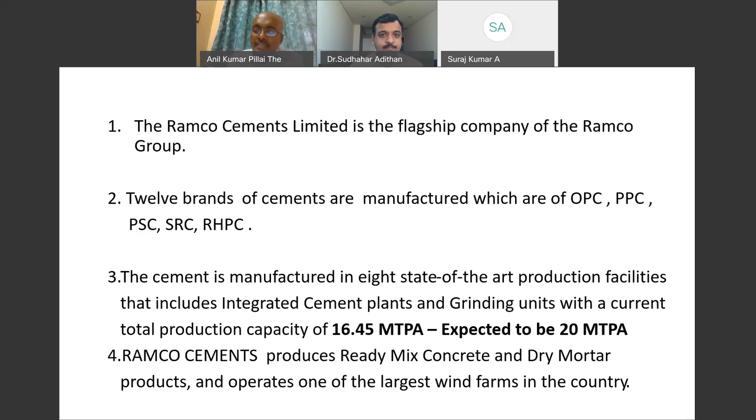Apart from cement, we are also into ready-mix concrete. We have an RMC plant at Chennai, and we have a dry mortar product established in collaboration with MTech Germany. Dry mortar product is very useful for non-structural applications, especially plastering, or for example Super Fine, which is our cement-based putty. We also have tile grout, and we operate one of the largest wind farms in the country, because from the sustainability perspective that is very important.

This is just an overview of the various types of cement that we manufacture. Within ordinary Portland cement, as per IS 269 - as all of you would be aware, now there is no longer a separate code for 43 and 53. Everything is combined, and it is IS 269.

We have also introduced a new customized cement for applications where you need higher slump retention - that is the Ramco Infra 53 grade. When we were doing trials with chemical admixtures, we found we could help ensure higher slump retention, especially in cities like Bangalore, when concrete is being transported over longer distances.

All of us would be aware that the construction sector is also using precast applications, and for that we thought, why not have a specific cement for precast applications. So we introduced Ramco Superfast, which gives a higher rate of gain of strength, because precast application requires faster removal of mold, minimum breakages, minimum edge breakage, and of course economy in terms of number of blocks per bag, which all precast units want to be higher. That is what Ramco Superfast helps in achieving.

Then we have the PPC cement - Super Grade, Supercrete, Super Fine, and Karthik Super Plus. Supercrete is a cement customized for all concreting applications, with the advantage of a high rate of gain of strength and low heat of hydration. Then we have Portland slag cement - Ramco Super Steel and Ramco Samudra - and our sulfate resisting cement, Ramco Super Post.

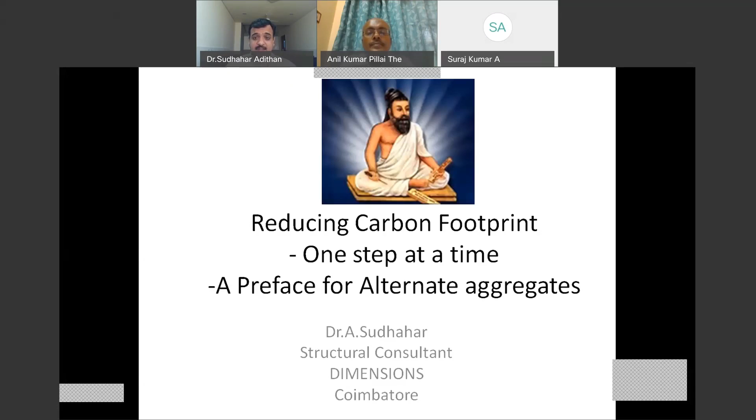The use of alternate aggregate should be more towards reducing the carbon footprint of our construction rather than using it for technology's sake or economy's sake. Of course, those are all benefits which we will achieve. But I think for a practicing civil engineer, his first responsibility is to reduce the carbon footprint, and that is why alternate aggregates take a driver's seat today, at least in today's topic. And this is one of his famous Tirukurals.

Excuse me for the blurred graphics. It is Katka Kasadara Katpavai Katrapi Nitka Adarkitaga, which means while learning, you'll have to learn it thoroughly, without a speck of dirt. And more important than learning is that you should stand by what you have learned.

This is where we as civil engineers sometimes fail in implementing sustainability. We all study about carbon footprint. We all study about being environmentally responsible. We know usage of resources unscrupulously would lead to more emission of greenhouse gases. Therefore, this will happen, that will happen. All this is known, but are we really standing by what we have studied is very important.

That is why the last three words in this Tirukural are very important: Nitka Adarkitaga, which means you'll have to stand by what you have learned. I think it is the order of the day that you'll have to stand by what you're going to learn in the next 1 hour and start promoting the use of alternate aggregates.

Now, this also is connected to Tamil literature. I will quickly go through this. Tamil literature has always classified the type of lands where people are living into 5 different categories. One is Kurunchi, which denotes hilly areas or hill-related areas. Mullai is forest-related area.

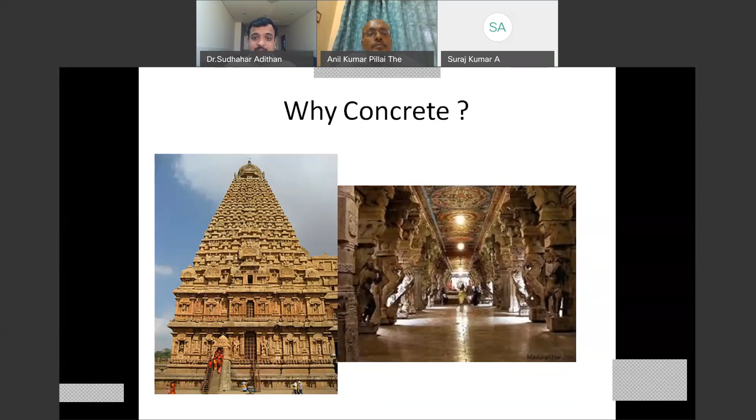Availability of stones were there. Therefore, the first forms of civilized constructions were all huge, and they mostly used stones. Then the limitation on handling such large loads came into picture, so we started using smaller stones. We started using stones only, but at a smaller load level, which means we reduced. We also started the usage of bricks, which were imitations of stones, but at a much smaller level.

So from large stones, we moved to small stones. From small stones, we moved to lighter small stones, which is the bricks and the small clay tiles. That is the predominant kind of material used in the palaces of Karaikudi, South India, and anywhere in India for that matter. So we came to smaller stones.

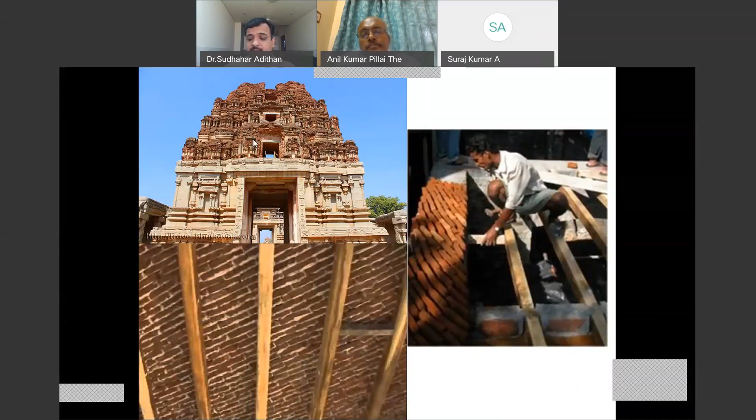Now we have moved to still smaller stones, namely the coarse aggregates. Now, in one perspective, I feel the capacity of a single human being to carry large weight has gone down due to some reason, some evolutionary reason. So we will have to delve deep into Darwin's theory to understand that.

But as such, on one side we have been improving in technology, on the other side we have been traveling towards convenience of using stones, and thereby we started developing alternates for stones, and we have ended up in something called concrete, which is nothing but an imitation of stone itself. Only thing is we use smaller size of stones, we use various other ingredients, make it very workable, moldable, and we cast them into the different shapes what we need. And once they set and harden, they again imitate stones. So the funda is to imitate a stone. So we started using concrete.

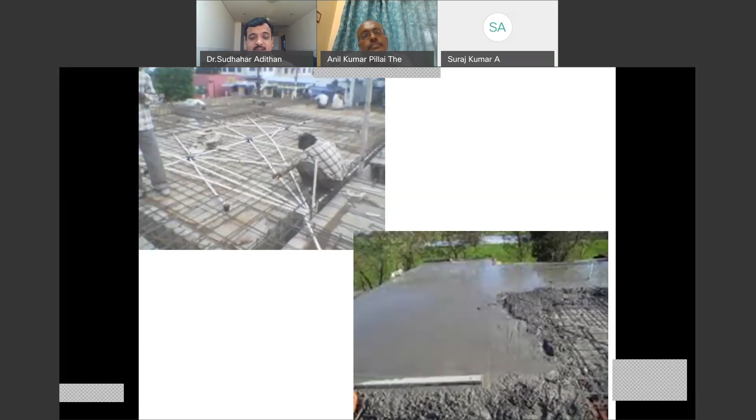So what do we have in concrete? Any civil engineer's answer would be concrete is a mixture of coarse aggregate, fine aggregate, with a binder, with water and some chemical admixtures, blah, blah, blah. There is a theoretical definition to it. But each of these ingredients have got a definite role to play in the concrete as a matrix itself. So what is the role of each ingredient? That has to be understood properly.

Now looking at concrete as a replacement for the stones, what is our requirement out of concrete? It is definitely the strength, because that determines the engineering parameter in which you can design these imitated stones, the concrete. Of course, the workability, because workability will define the ease in which you can cast them into the required shape and size. So the ease of casting is called workability. We also need durability, because we need to have a very practical and affordable lifespan for the concrete structures what we design.

Now, if you look at concrete as a matrix, there are a lot of factors which influence the performance of concrete as a structure. The major headings are materials, the concrete mix itself, the mix proportions of concrete, the method of construction you do, and the design you do for the structure, not the concrete mix design, I'm talking about the design. If you look at the materials, aggregates are there, the type of aggregates, the grading of aggregates. We'll be dwelling about this in detail in a little while from now.

So the materials, namely aggregate, cement, water, and admixture, have a key role in determining the quality of concrete and therefore in determining the performance of the concrete structure.

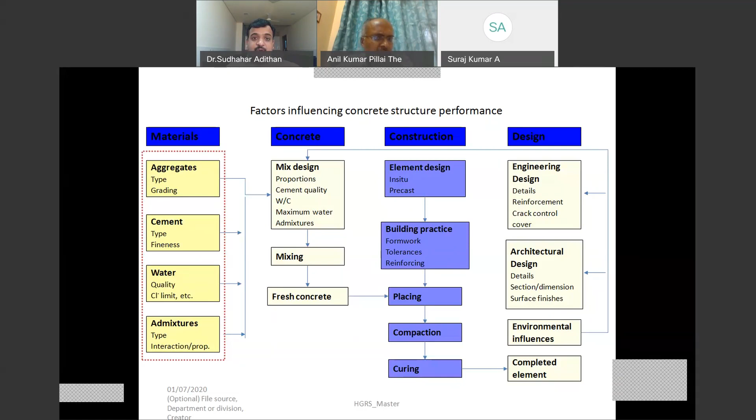If you are not able to bite it, you have pain, and it is very difficult to bite, then probably it's time for you to visit a dentist. So it will be that hard. Now what we learn from this is, as we just saw, the primary requirement of concrete is durability, I mean, strength.

So if concrete becomes as strong as this, and if its macro structure can also be compared to this, then are we achieving the purpose? No, because this has got a lot of porosity. If you try to pour a spoon of ghee or water or any liquid on top of it, you can understand that it will start oozing through and percolate out, which means it has got voids.

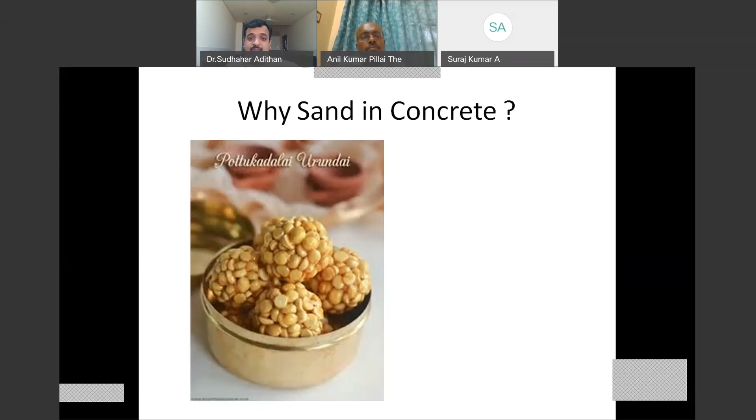So to prevent ingress of liquid, you have another snack, produced from the same ingredients but prepared from the flour of that gram. It is called ma laddu. That gram has been grinded into a finer form, which I would like to compare to fine aggregate. The same jaggery is used and made into the form of a laddu. Now if you pour a spoon of ghee or any oil on top of it, it doesn't percolate inside. So it is dense.

So it will very well protect your reinforcement system if you can prepare a concrete like this. But what you will observe is you will not get the strength, because if you use the same amount of jaggery, the strength development, the kind of stiffness which develops inside this snack, is reduced. Which means if you are using finer material, you will have to use more jaggery. In concrete terms, if you are using finer material, you will have to use more cement, which will again kill your economy. Now this is good in terms of not allowing water to pass through, but it doesn't satisfy your strength without sacrificing your economy.

Now we had found out a newly improvised snack, which is a combination of 1 plus 2, which has got the coarse whole gram as such, and the flour of the powdered form of the dal, and also you have jaggery. Now this system satisfies both. It offers you the rigidness or strength of the first one, and it also serves as an impermeable system where you cannot percolate any liquid through this.

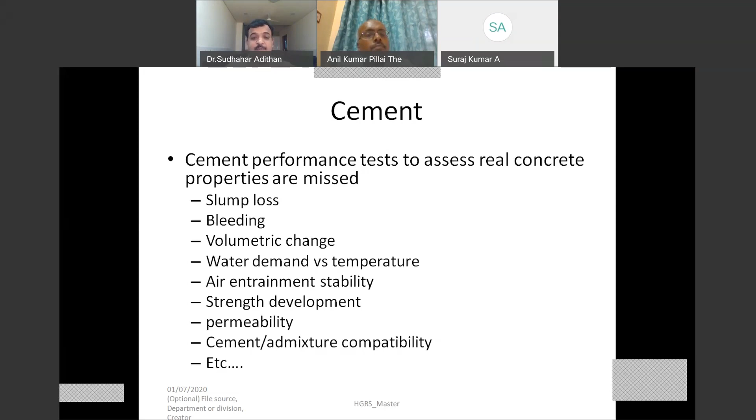It has got two implications. One is the physical properties of cement, which can affect the rheology or performance of concrete. By physical properties, I'm talking about particle size distribution, setting time, consistency of cement, etc.

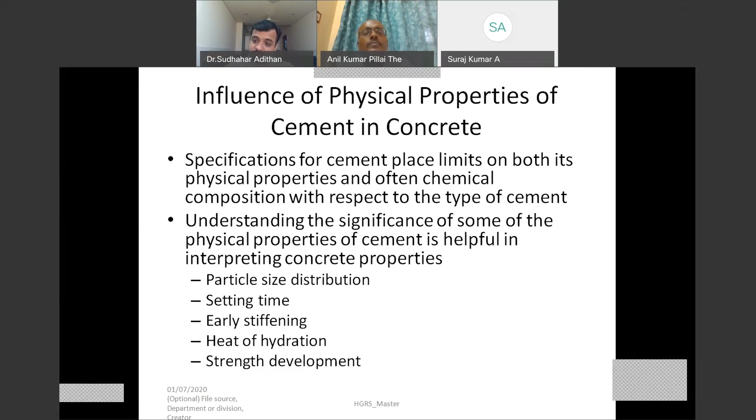There is also the chemistry of cement itself, which is very important to know, like how the Bogue compounds are reacting, what would be its implication in the isothermal conditions of the concrete, which compound will react when, what is the sequence of reaction, when would the ettringite be formed.

All these are very vital for us to take a decision whether we can introduce a particular form of aggregate as a replacement for the conventional aggregate, because each aggregate has its own physical and chemical nature. So we need to know where we can fit the chemical nature of our proposed aggregate into the system, with the view of the cement being used, because as of now we don't have an alternate for cement, at least on a commercial or practical sense, whereas replacement for aggregates has already reached a practical level at the site and project level.

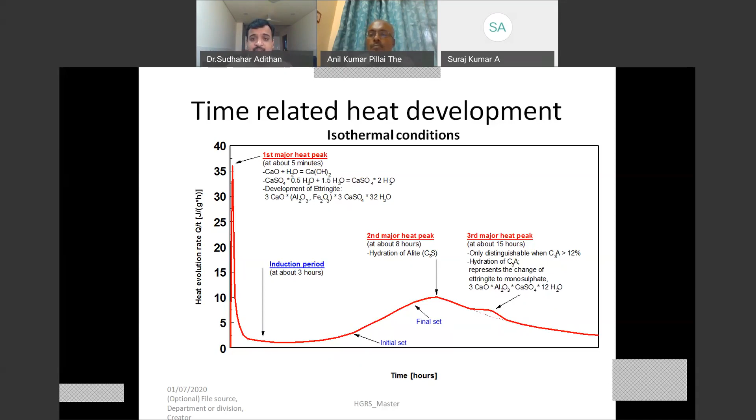So it is important for us to understand the chemical reaction of cement, for which I've given this graph as a representation, which talks about the isothermal conditions and role of each of the Bogue compounds in the hydration of cement. Coming to aggregates.

If you theoretically classify aggregates, you can classify them into two types: primary aggregates and alternate aggregates. But on an academic level, people have segregated this into three categories: primary, alternative, and manufactured. On a practical sense, I would treat both alternative aggregate and manufactured aggregate into one silo - these are all alternates for the conventional or primary aggregates.

These alternative aggregates are further classified into recycled aggregates and secondary aggregates. Recycled aggregates, as the name suggests, is primarily construction demolition waste which is again brought into use. So a concrete may be pulverized and segregated into coarse aggregate and fine aggregate from construction demolition waste.

We would also look into what the code book has to say about these alternate aggregates - I'll share some snapshots from the code books. Basically, these are all alternative aggregates, either in the aggregate form itself, that is construction demolition waste, or it could be a byproduct from other industries, for example bottom ash, copper slags, steel slags, etc. These are byproducts from other industries which can be used as an alternative for conventional aggregates.

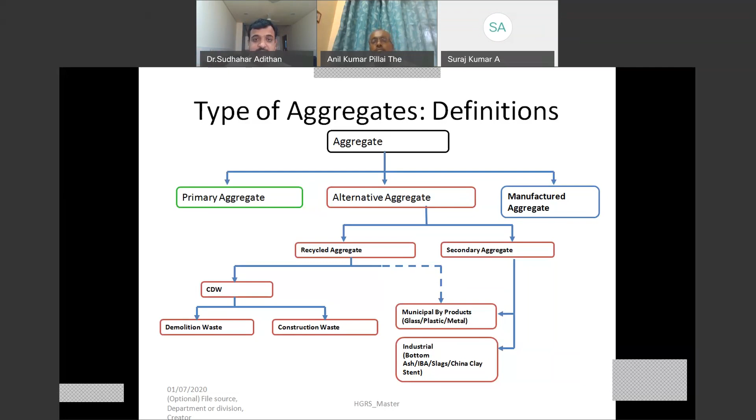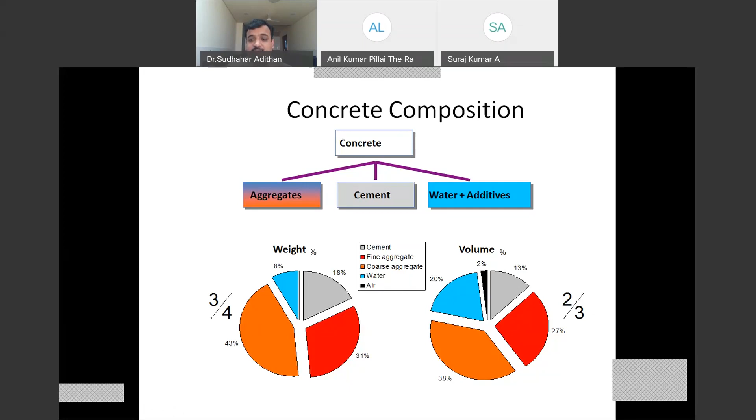If you look at concrete as a matrix in terms of weight, roughly 3/4, or 75% of it, constitutes the aggregate mass. In terms of volume, it is 2/3. You can see in both pie charts there is only one major difference: the presence of entrapped air. In terms of volume it is quantified, whereas in terms of mass it cannot be quantified, because for a concrete system the weight of air is treated as zero. So the moral of this chart is we should acknowledge that the major part of concrete is aggregates, and cement, though very vital both by mass and volume, the quantity is very small, though its role is very significant.

Now, what are the requirements of concrete aggregate? Any concrete technology textbook would tell you these requirements. It should be sound, meaning it should not have volume expansion or contraction with variation of temperature - it should be very sound. It should be clean - it should not have dirt or other impurities.

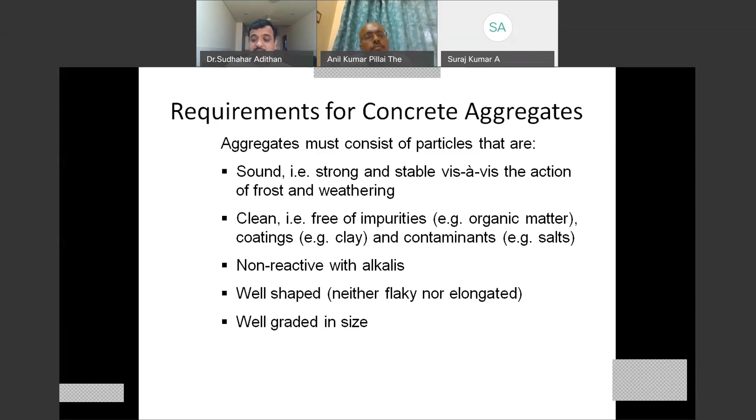It should not have a potential of alkali aggregate reaction, meaning it should not react with the alkalis from the binder, namely cement. Its shape is very important - it should not be flaky or elongated. This matters in terms of workability, but there are many situations where shape matters even more, especially for exposed concrete surfaces. The shape and size of the aggregates matter a lot, more than the engineering qualities of the aggregate itself.

Aggregates form up to 80% of the volume of concrete. They are ideally assumed as inert fillers, as long as you want to consider them very inert and non-participating in the system. But modern day research is finding a lot of information that aggregates can also participate in the hydration and result in different performance of the concrete system. So it is not always imperative that aggregates have to be considered as inert only.

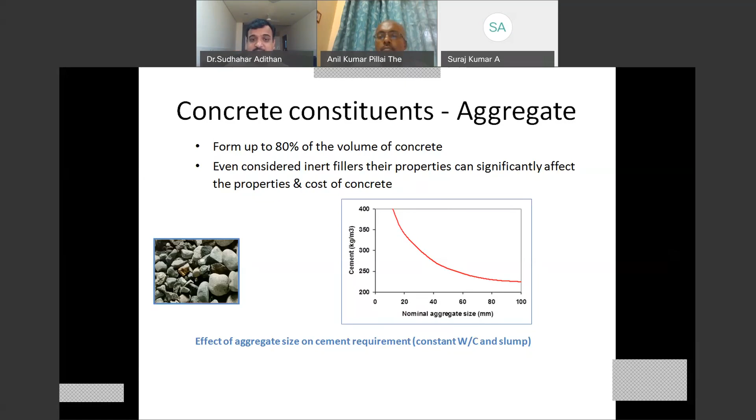The size of aggregates does matter, as we were just discussing. If the size of aggregates goes smaller, the requirement of the binder becomes larger, because for the same mass, a finer system has more surface area, which means it needs more binder to coat itself. As a result, you require more cementitious content in your concrete system. This graph is a simple depiction of it - don't take the values, but look at the pattern. If your nominal aggregate size is increasing, the requirement of your cement adequacy will come down.

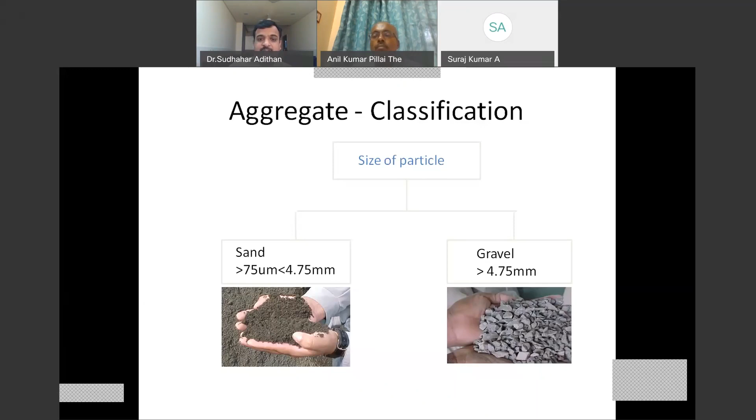If you have to stick to aggregate classification as far as concrete technology is concerned, whatever is above 4.75 mm you classify as coarse aggregate or gravel, and whatever is between 75 microns and 4.75 mm you classify as sand. Even though very purely you cannot take away minus 75 micron sizes from sand, generally a particle just below 75 microns and further down is classified as clay or silt. It doesn't mean they will not be present in the sand system - they will be present to a very negligible extent. So sand is basically between 75 microns and 4.75 mm.

The important characteristics of any aggregate are its shape and texture - shape in terms of achieving workability, achieving the compaction required, achieving the minimum void content. All those things are determined by the shape and size of the aggregates. The texture plays a key role in inter-particulate friction, and therefore also affects the workability of the concrete system. The grading, the different sizes available - we will talk about grading through an example now. The grading, color, strength, water absorption, surface - these are all very theoretical stuff which any checklist on aggregates would tell you. Resistance to freezing and thawing is not a very prominent feature looked into in Indian conditions, but in our projects in European countries, this is a very important point.

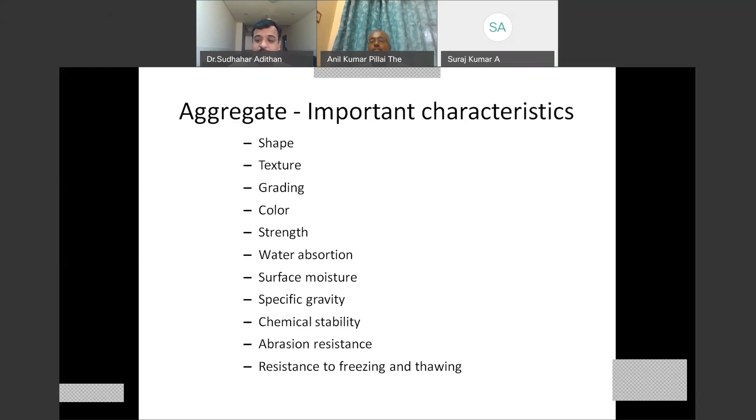Talking about the shape of aggregates - this applies to any aggregate, including alternate aggregates. Right now we're talking in very generic terms about aggregates, and slowly we will move into alternate aggregates. This is applicable for any aggregate, primary or alternate. The desirable shapes are mostly rounded, irregular, and angular. Rounded and irregular are very difficult to manufacture. Angular is easily manufacturable through the modern VSI systems of manufactured sand manufacturing.

What should not be there is flaky or elongated aggregates, as you would appreciate, this creates a lot of interparticle friction and will not allow the concrete to flow. So to achieve workability, you will have to do it either by increasing fine aggregate content, which means adding more cement and killing economy, or through increased water cement ratio, which will bring down the strength of the concrete system, or through increased usage of admixtures, which will again not make your cost effectiveness viable. So at the aggregate selection level, you should be very particular about the shape and size.

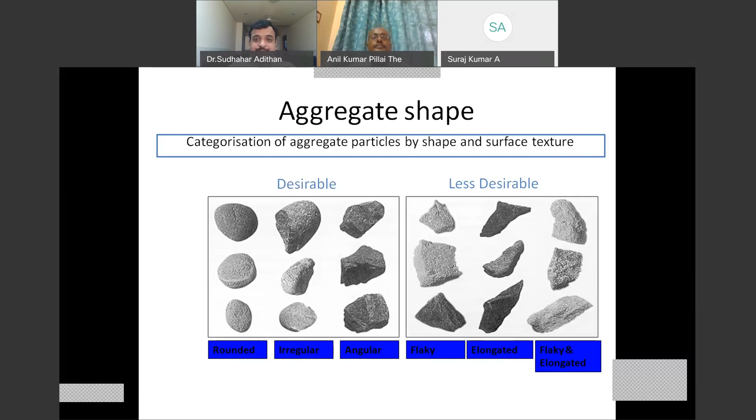Aggregate grading affects the following properties of concrete. It will influence the water requirements, the workability, pumpability, and economy, which is a very common sense thing - anybody who has touched concrete would be able to appreciate all these things. A bad shape of aggregate means a bad economy of the concrete itself.

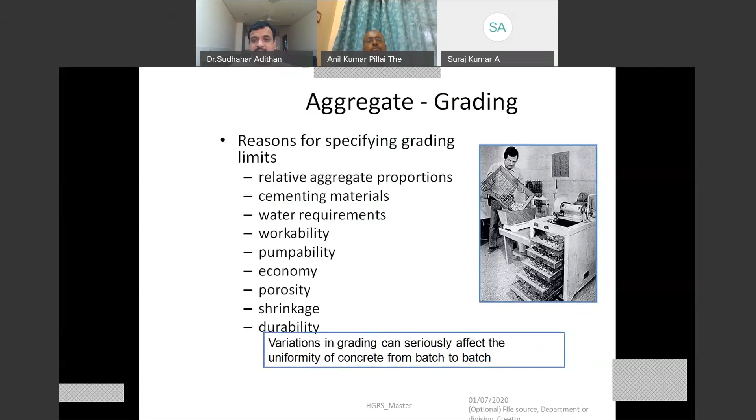This is a graph which we would have done umpteen number of times when we were a student. Sometimes those who are in the labs of construction companies would do it. I was just chatting with Anil sir about this particular aspect. A lot of us don't understand the importance of these grading curves, and in fact we don't understand the meanings of what these grading curves are telling us.

There is a reason for us to plot these in a semi-log sheet itself rather than a normal graph sheet. Try plotting a particle size distribution in a normal graph sheet, and probably you would require a graph sheet as big as a 10 by 10 wall. So to make it comprehensible, to make it practically usable, we are using a semi-log sheet.

So you should understand the implication of these shapes on the particle size analysis, be it fine aggregate, coarse aggregate, or all-in aggregate. I've been trying to push this as a very important point in the concrete technology syllabus in various universities. The sieve analysis of all-in aggregate, meaning coarse aggregate plus fine aggregate put together, gives a lot more meaning to concrete mix design rather than looking at the particle size distribution in isolation.

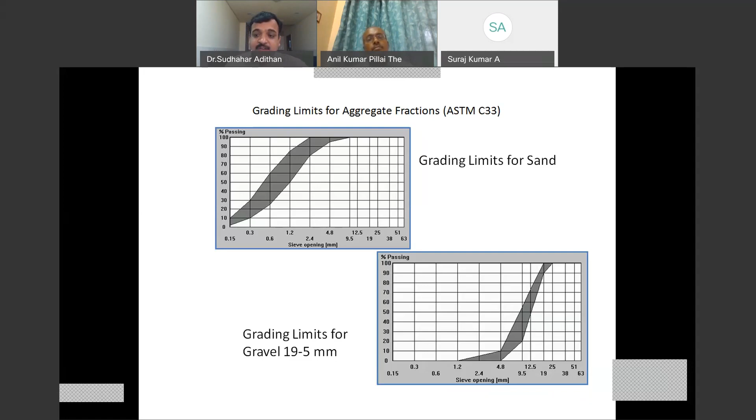So I would request, especially if there are students watching this lecture, please delve more into these graphs and try to understand what they are trying to convey to us.

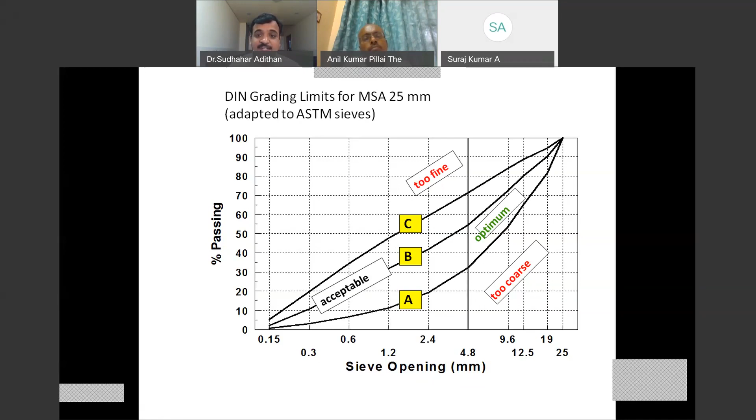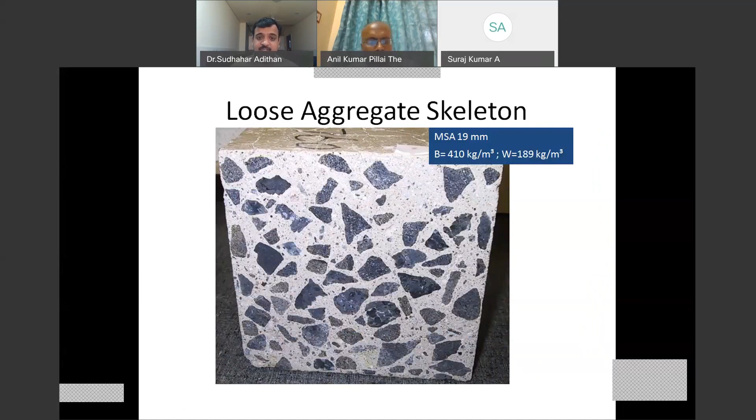You will have to understand a lot of graphs, the all-in aggregate graphs, to achieve that - the moisture content of the aggregate, the behavior of the aggregate vis-a-vis moisture, because all our mix designs are done based on this saturated surface dry condition. So while choosing alternate aggregates, we should be convinced, or have a cognizance, of whether our aggregate will be able to achieve this condition during the mix.

If not, what will be the condition of the aggregates when we use it practically, and therefore what kind of alterations you should do to the mix design itself. It is not that you create a mix design for the primary aggregates and just replace 10%, 20%, 30% of that with alternate aggregates and then do the experimentation. No, if you are replacing it with 10% alternate aggregates, you will have to see the implications in terms of moisture absorption, etc., alter the mix design accordingly, and then do the casting.

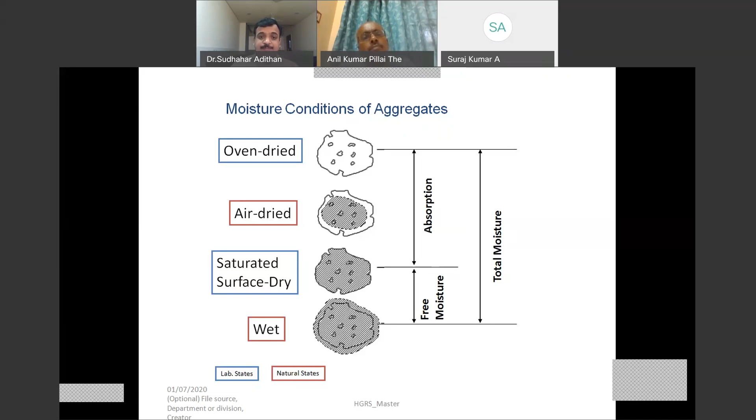The moisture content test nowadays is replaced by infrared moisture meters.

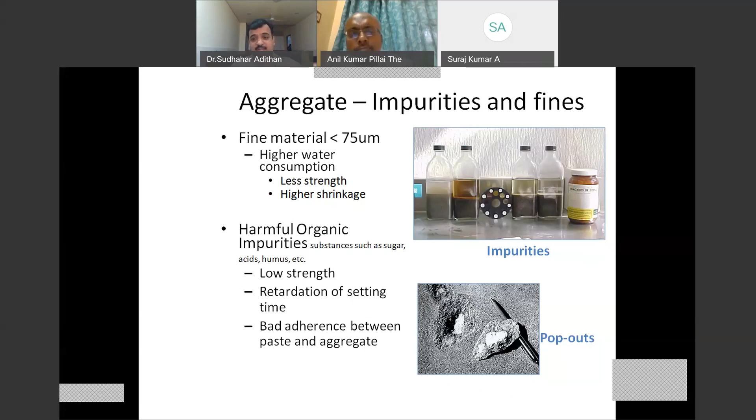The checking of impurities and fines in aggregates is very important, and it is very important in terms of alternate aggregates, because the presence of fines or even chemicals like cellulose, sugar, or acid, etc., will do a lot of interaction, will do a lot of hindrance to the binder performance itself. Therefore, you'll have to study all these before you choose an alternate aggregate system.

So we will quickly go into the alternate system. Now, if I have decided to use an alternate aggregate system, what should I do? I cannot just take an alternate system, replace the primary system and start using the concrete. I should authenticate myself, be self-satisfied and certified to use that alternate system. So I started searching who is the authority to permit me to use an alternate system, where to refer, how to approach this whole process.

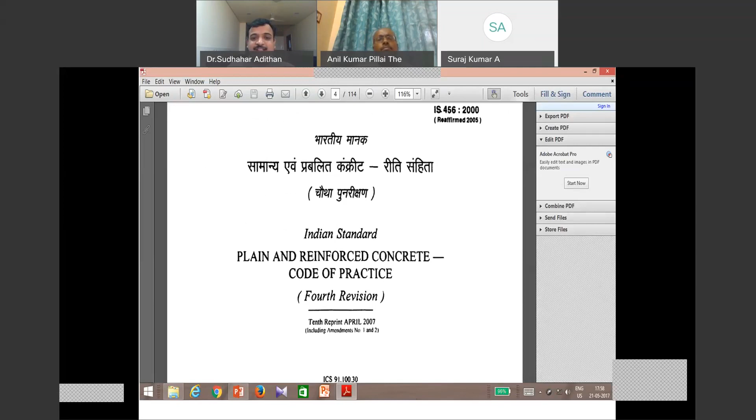So I started browsing through the basic book, IS 456, called the Bible of the Civil Engineer, or at least the Indian Civil Engineer. When I started browsing this, I found that under the aggregates section, clause 5.3, it says aggregate shall comply with the requirements of IS 383. As far as possible, preference shall be given to natural aggregate.

It's 'as far as possible' - I think in the next edition of IS 456, they will change this. We should in fact be telling that as far as possible, we should be giving importance to non-natural aggregates. Excuse me for a second, I am just running out of power here. I'm just trying to...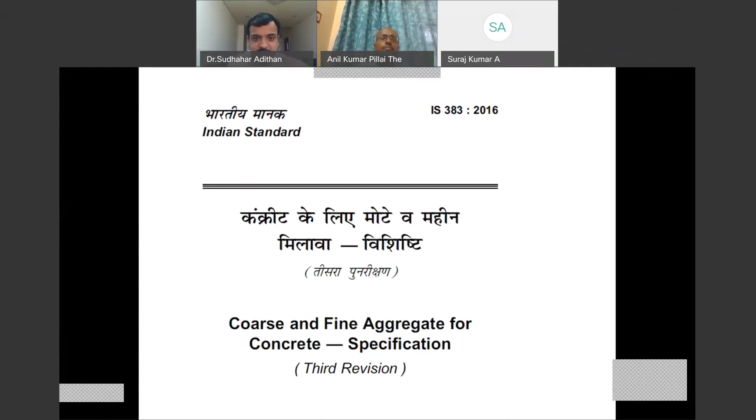So IS 383 is the reference in IS 456, so I switched over to IS 383. This is the old version, and now you have a 2016 version, which is a code book for coarse and fine aggregate for concrete specifications. Earlier it was specification for coarse and fine aggregates from natural sources only. Now that word 'natural sources' has been removed. Now it is only for concrete, and in the foreword it says you can use aggregates from any of the grading zones.

So you can use any of the aggregates from zone 1 to zone 4. But they say once you are using zone 4, you'll have to be satisfied with yourself by conducting a number of tests - meaning it doesn't bar you from using aggregates from any zone. Many practicing engineers had a doubt. Whenever I interact with them, they say they are supposed to use only zone 2 sand, and will not use any other zone sand. No, the foreword itself says you can use sand from any zone of classification. Only thing is, you'll have to make the mix design accordingly.

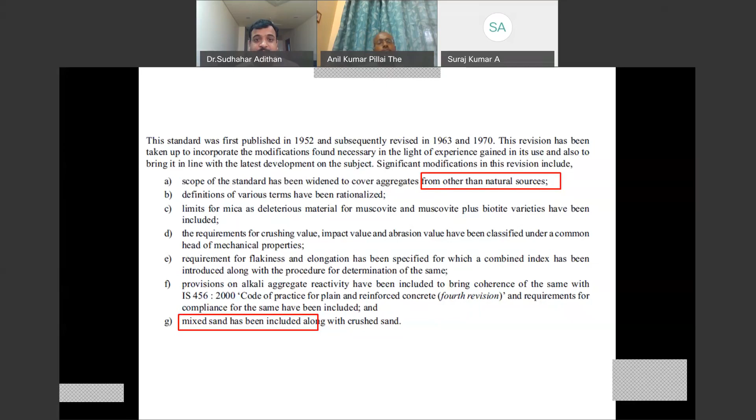Now, again, what does it speak about fine aggregate? It speaks about natural sand, crushed stone sand - popularly known as M sand in today's parlance. Now there is one more sand called P sand. Instead of M sand, we are talking about P sand also, which is a more refined form of M sand used only for plastering. So you can use natural sand, crushed stone sand, and also crushed gravel sand.

Now it also permits utilization of iron slag, steel slag, copper slag. Now this is interesting - a lot of people think iron slag and steel slag are the same. No, the process is different, and the chemical nature is also different. So you'll have to study them further in detail. A brief about all these manufacturing processes and the usage of these alternates is given in the annexure of IS 383 itself.

So you can use iron slag, steel slag, copper slag, bottom ash from thermal power plants. Of course, fly ash is used by the cement industry, concrete industry, and fly ash brick manufacturing industry. You can use bottom ash in form of aggregates, you can use recycled concrete aggregates - RCA - and recycled aggregates. These are slightly different: recycled aggregates can also be bricks, recycled bricks, whereas recycled concrete aggregates pertain to concrete alone. The code books permit us to use any of these as an alternate.

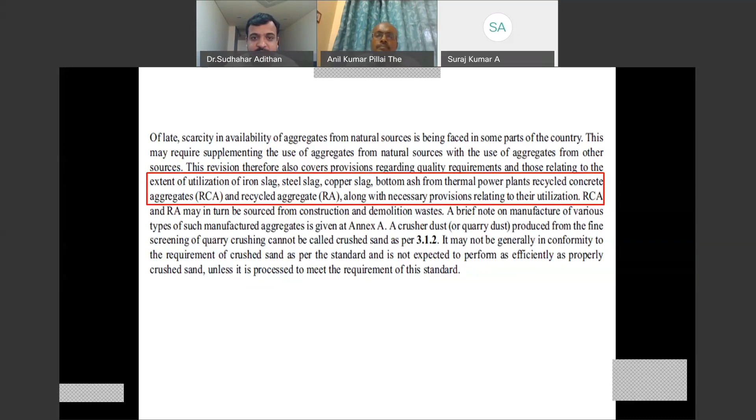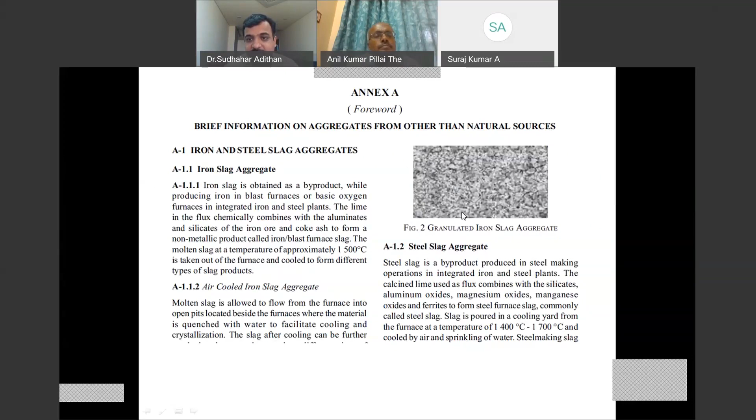I was talking to you about the annexure. This is annexure A of IS 383, which talks about granulated iron slag aggregate. This is air-cooled iron slag aggregate used as a coarse aggregate, mind you. The one to the bottom right is the steel slag aggregate.

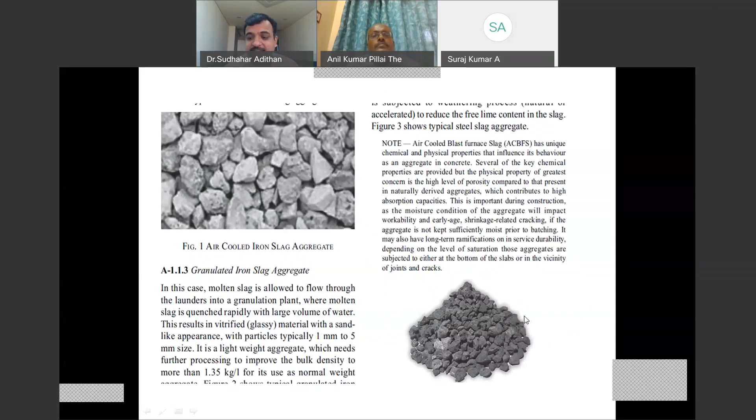This is copper slag aggregate used also as fine aggregate. Nowadays, you also have a coarse aggregate version of it. Demolition waste, used as construction demolition waste, CDW as it is properly called, can also be used as an aggregate. Recycled aggregate is also used as an aggregate.

Recycled aggregate, as I told you, can contain anything other than concrete also. It could be tiles also, or pulverized tiles, which can be used as recycled aggregates.

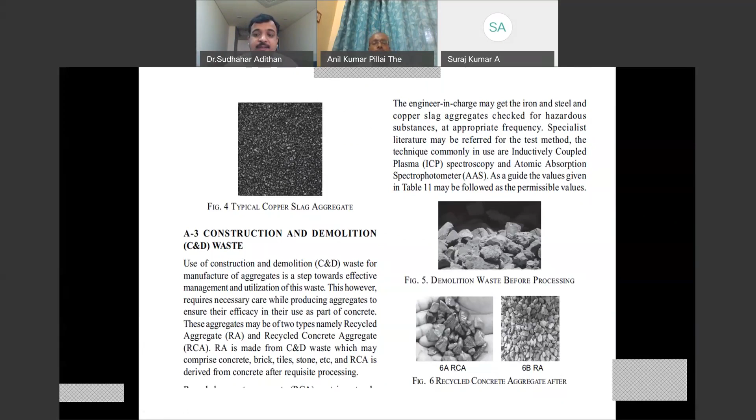I visited a plant in New Delhi where they do wonderful work recycling construction demolition waste. If you can get leads to it, I think it will give you more insights into quality control of construction demolition waste. Now this is a very common question amongst practicing builders and engineers.

We are all sometimes confused, or sometimes cheated by suppliers, by these terms: M-sand, quarry dust, and what a few documents indicate as CRF, crushed rock fines. Are all these the same, or are they all different?

Though the primary geological source is the same, M-sand and quarry dust are not the same. Their particle size distribution is not the same. Their participation in the rheology of the fresh concrete is not the same. So you will have to use them very judiciously by altering your mix design.

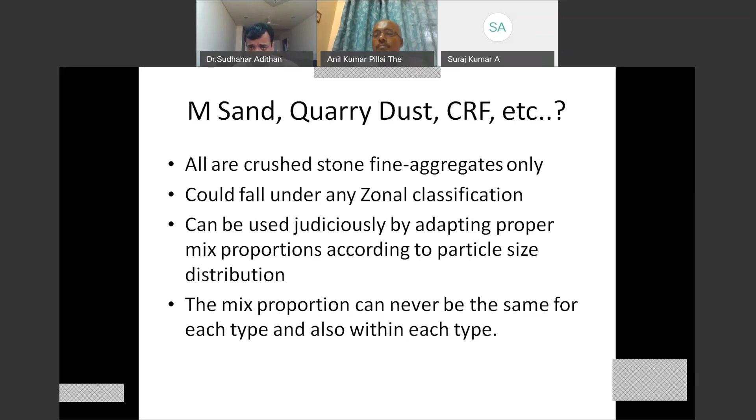You cannot consider anything which is gray and powdery as M-sand. A lot of people are even cheated. So please do adopt site testing practices for M-sand usage at least, and you can develop your own testing manuals for site in case you are using other aggregates.

This is again an excerpt from IS 383 only. It gives a special mention in the last few lines: crusher dust or quarry dust produced from the fine screening of quarry crushing cannot be called crushed sand. It may not generally conform to the requirement of crushed sand as per the standard, and it is not expected to perform as efficiently as properly crushed sand unless it is processed to meet the requirement of this standard.

This does not prevent you from using quarry dust as a fine aggregate, but you will have to process it or modify your mix design accordingly in order to use it as a fine aggregate. Otherwise, you will have to use only M-sand.

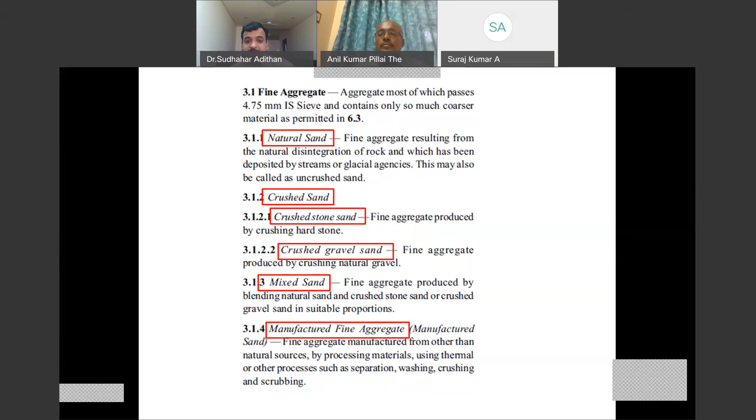This is very important. Table number 1 of IS 383 also restricts you to the extent to which you can replace the natural sand.

I find a lot of high level researchers, or PG level researchers, attempting something like 100% replacement, whereas the code book stipulates that if you are using iron slag as an aggregate, in plain concrete you can only replace 50%, and in reinforced concrete you can replace only up to 25%.

By ignoring this, if you go to 40%, 50%, maybe you will get your graph, maybe you will get your strength, but it will have long-term implications. This recommendation has been prepared by properly studying the chemical nature, its interference with the binder, the long-term effects, the effects of weathering, and the effects of pollution, all taken into consideration.

So it is very important for us to take note of this. If you are using it in plain concrete, it is a little more liberal. In lean concrete, less than M15 grade, it is almost liberal. For PCC and such, you can use even 100%, because they are only used as temporary beddings and don't structurally participate. But when it is structurally participating, or if the plain concrete itself is an integral part of the building system, for example a flooring system, then you will have to adhere to the following limitations.

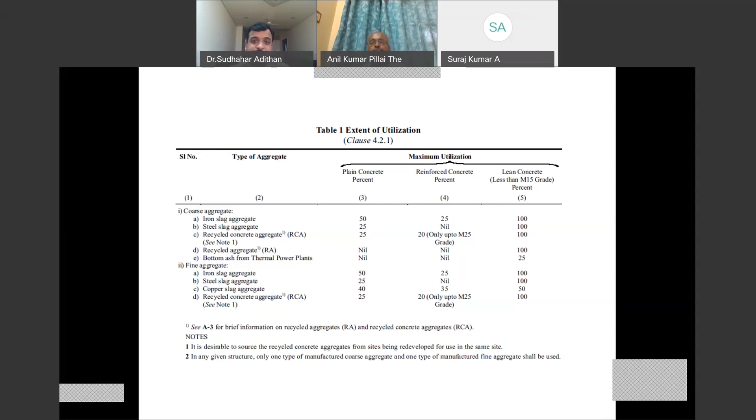Presence of deleterious materials, yes, it is a very important test. Civil engineers should know how to perform this test. I have seen a number of labs, or at least institutional labs, referring it to the chemistry department.

They do a very compartmentalized testing without knowing the application part of it. So engineers are being trained in the deleterious materials test for aggregates.

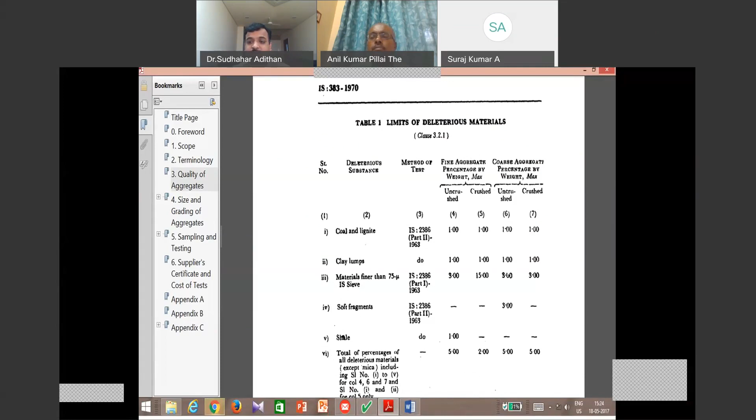This is the table of IS 383. It is not different in the 2016 version also, which gives you the limitation or upper limit of presence of deleterious material. This is the table from IS 383 2016 version, again for deleterious material.

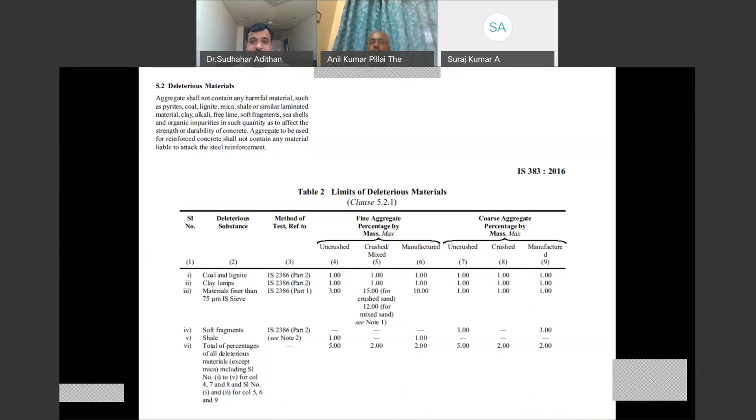Alkali aggregate reaction - I told you, you will have to take note of the chemical content of the alternate aggregate to be used, and ensure that it doesn't have a potential of alkali aggregate reaction, especially with the alkalis produced by the cement matrix.

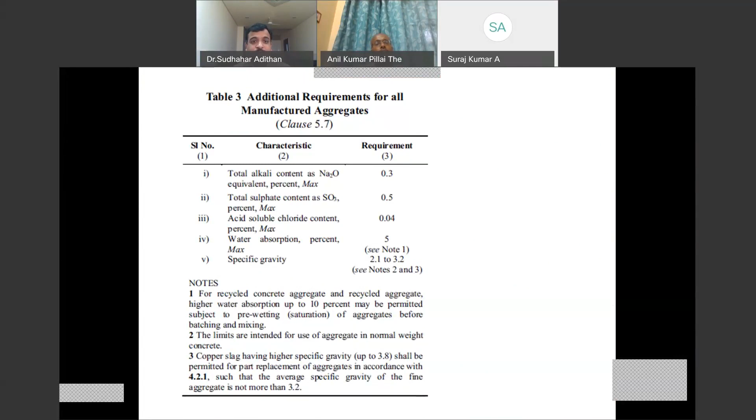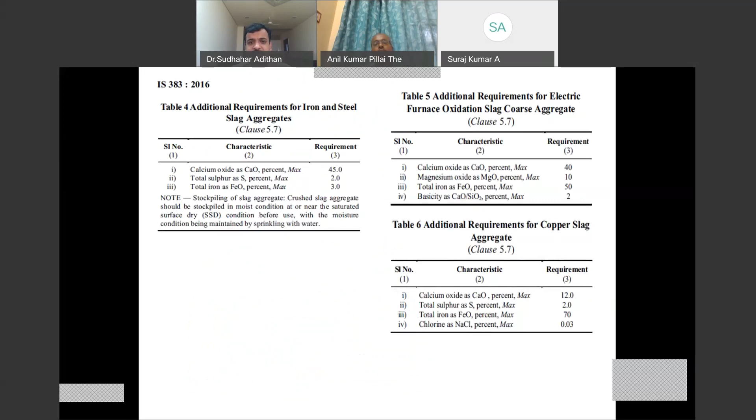So these are the codal provisions. Go through IS 383. It is all very simple and obviously given in the stipulations. What I'm trying to highlight here is, don't be afraid of using an alternate aggregate as long as you are within the limits specified by IS 383.

What is very important is the grading. Next is the moisture absorption capacities of these aggregates. Then the chemical nature - if you are trying anything beyond what is mentioned in IS 383, you will have to study the chemical nature in detail, especially in terms of presence of deleterious material and also the potential of alkali aggregate reaction.

But what I don't want you to be afraid of is the zoning, particle size distribution of manufactured sands or alternate sands, because if you're not left with choices, there is always a possibility of re-altering your mix design and still making the concrete economically viable and performing to the required engineering standards. So don't be afraid to use finer sand.

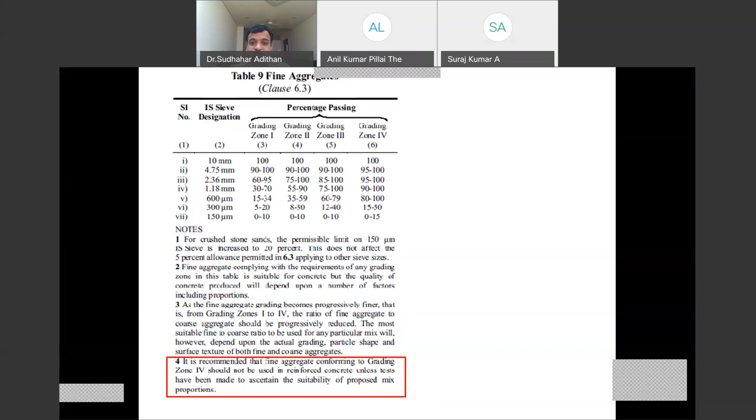I would also request you to study table number 9 of IS 456, which gives the indication towards nominal mixes. So nominal mixes has to be very carefully understood. A lot of people think 1, 1.5, 3 is M20, and 1-2-4 is M15. No, please go through table number 9 once again.

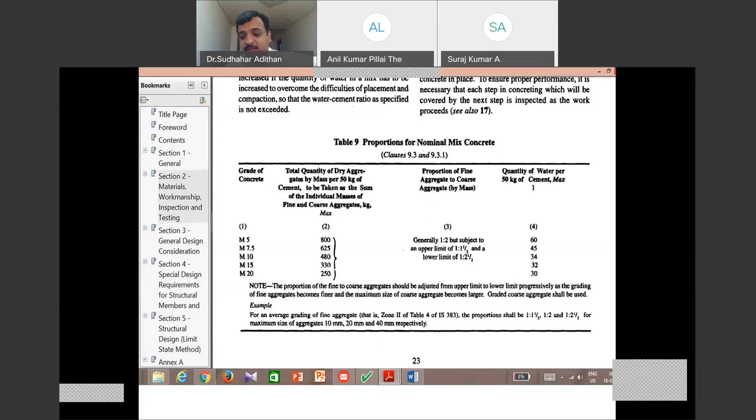This way you will understand that you are wasting a lot of cement. So please be careful. I put this picture.

The alternates for river sand are many: M sand, dolomite rock sand, granite waste. The sawing waste from the granite industry is a very useful alternate, especially in the Bangalore, Hosur belt. You have access to these kinds of waste. So these are the alternates which you can think about.